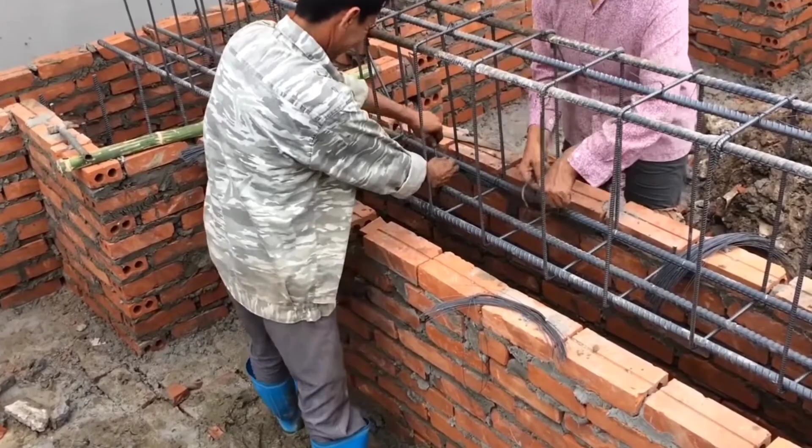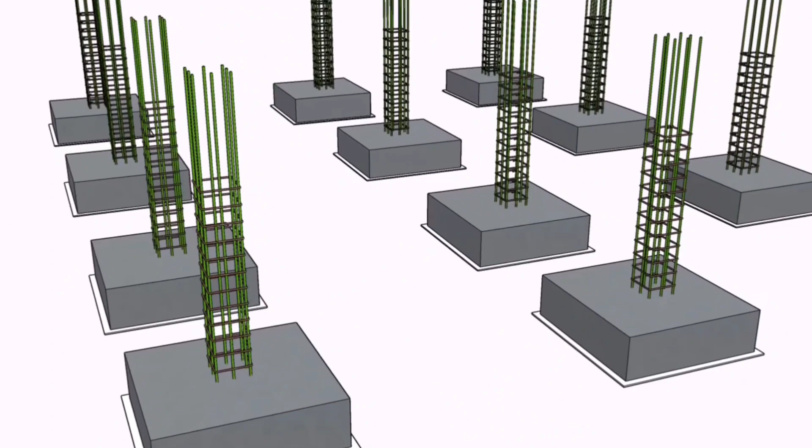Civil engineering is one of the oldest engineering branches and one of the best career options in engineering. Civil engineers are everywhere in demand, from municipal work to big construction projects. To have a successful career in civil engineering, basic knowledge is crucial about the related field. Civil engineering is a complex field that requires many knowledge, skills, and abilities to succeed.

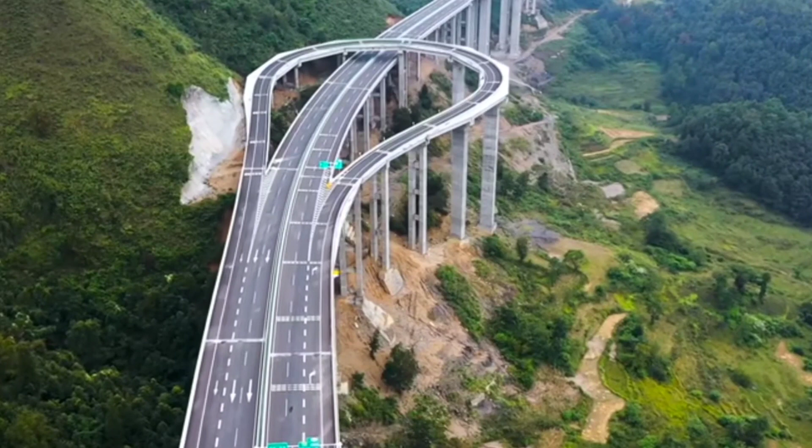It's not possible to become a civil engineer without having a degree in the area. But if you're getting started as a new civil engineer on your path to becoming a professional, you'll need these essential skills. Civil engineers are more in demand in construction, real estate, infrastructure projects, oil and gas, and other related industries. These are some of the largest and biggest employers worldwide after agriculture.

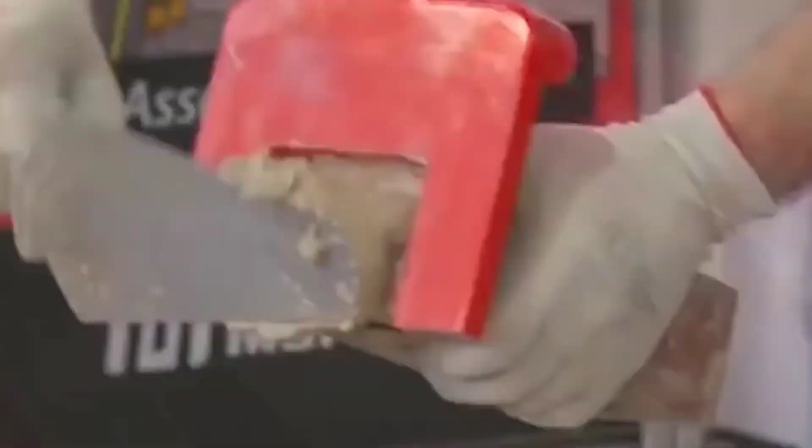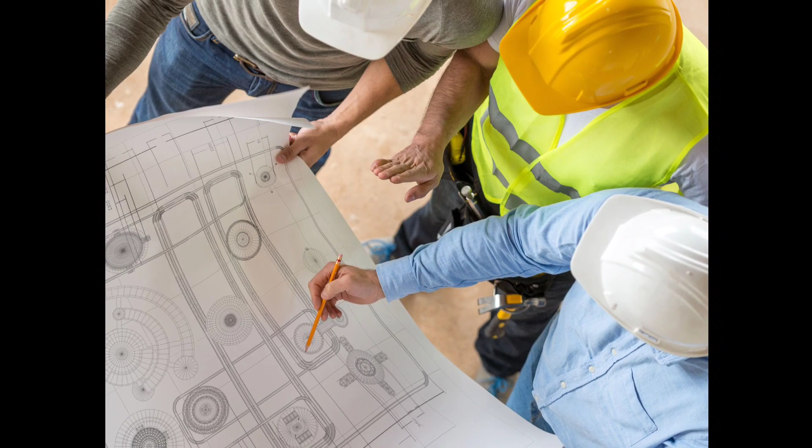A civil engineer needs to know basic civil engineering. These civil engineering basic knowledge, skills, qualities, and technical skills are essential for a fresher civil engineer. Civil engineers must improve their basic knowledge of civil engineering subjects and civil construction. As a fresher civil engineer, it is recommended you should add these skill sets to your resume and career profile. A person's abilities in civil engineering and the software skills required to become a successful civil engineer are discussed here.

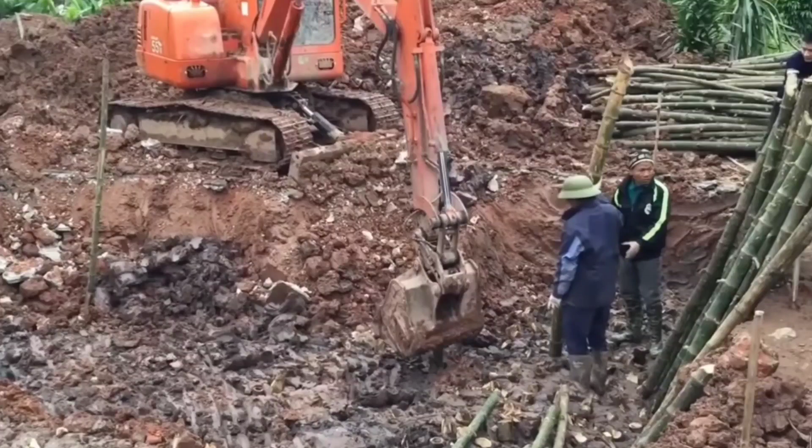So let's get started. Civil engineers design significant construction projects, such as roads, airports, tunnels, dams, and bridges. They also supervise project construction and maintenance. They must possess a comprehensive skill set, from cost accounting to geology. Many civil engineers have jobs that require a very hands-on role in construction, while others may have positions more heavily weighted toward supervisory and administrative skills.

So, civil engineers need to know the basics of civil engineering. As a civil engineer, you need to have the fundamentals of civil engineering to be successful. These include understanding the construction of bridges, dams, and buildings. It is also essential that you learn the basics of surveying and drafting to get involved in land surveying. Civil engineers must often manage complex projects, leading many to specialize in several areas.

You can find all the information and the essential skills and qualities and civil engineering basics to become a successful civil engineer. It is advisable to understand the basics of civil engineering theory and its applications before applying for a job in civil engineering. The relevant technical skills required by civil engineers include project planning, design, construction, introduction to geology and surveying, etc. A good civil engineer should have a level of mathematics and physics that identifies and solves engineering problems.

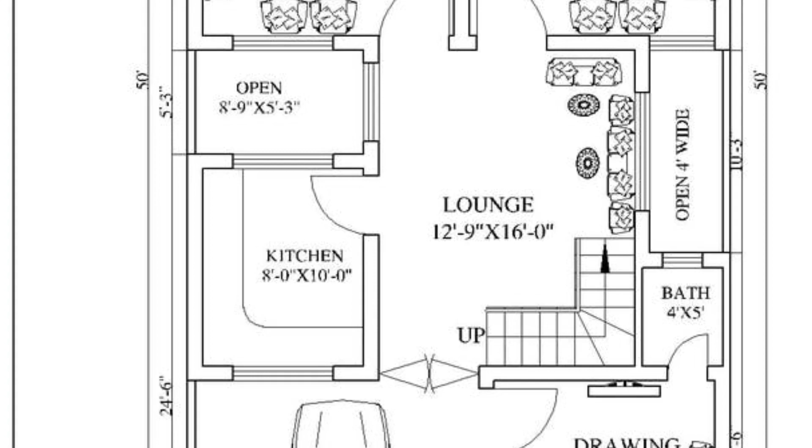Civil engineers also need to be skilled in design techniques and working with maps, drawings, models, and CAD software. They need to predict any possible future problems and find solutions for them. Every civil engineer must possess a high level of technical skills to carry out construction projects. Following are some of the top technologies they need to know.

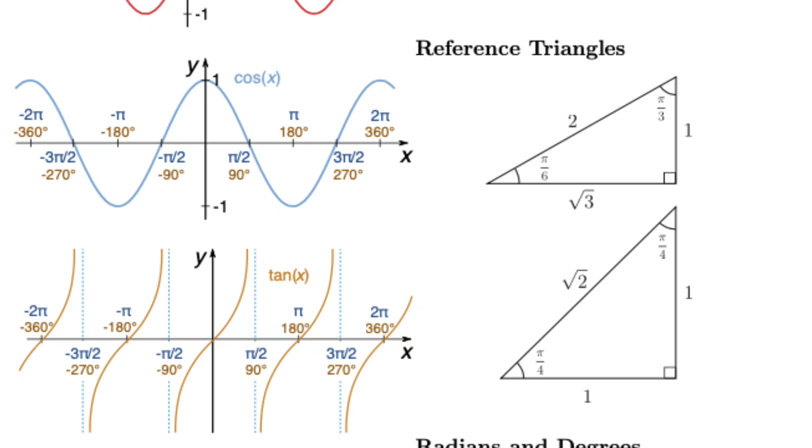Math skills. Civil engineers use the principles of calculus, trigonometry, and other advanced topics in mathematics for analysis, design, and troubleshooting in their work. Tests of building materials.

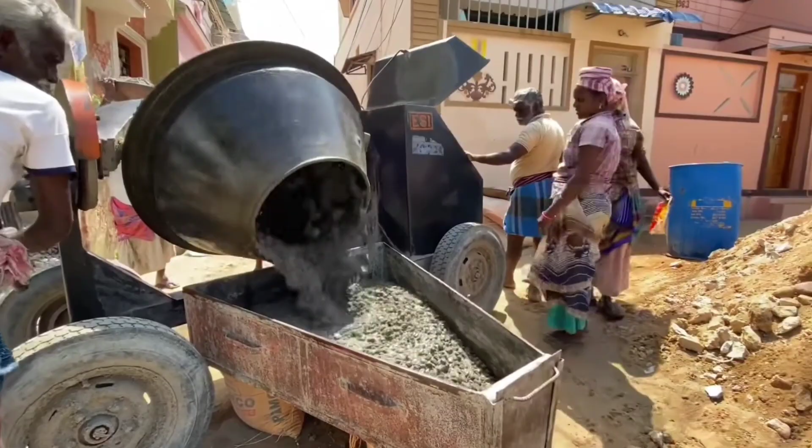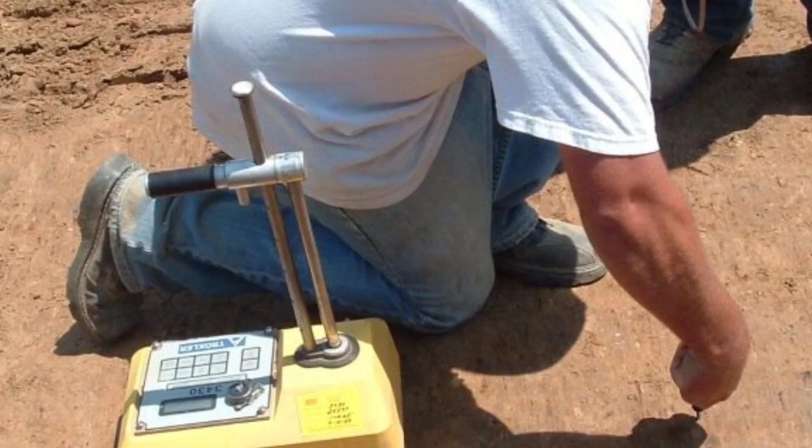A sound civil engineer should have proper knowledge of different tests of building materials. Some actual tests are listed below: concrete test - slump, compression, split tensile, and soundness test. Soil test - core cutter, compaction, sand replacement, triaxial, consolidation test. Bitumen test - ductility, softening point, gravity, and penetration test. Detailed video about the important points to gather in these types of tests within this week.

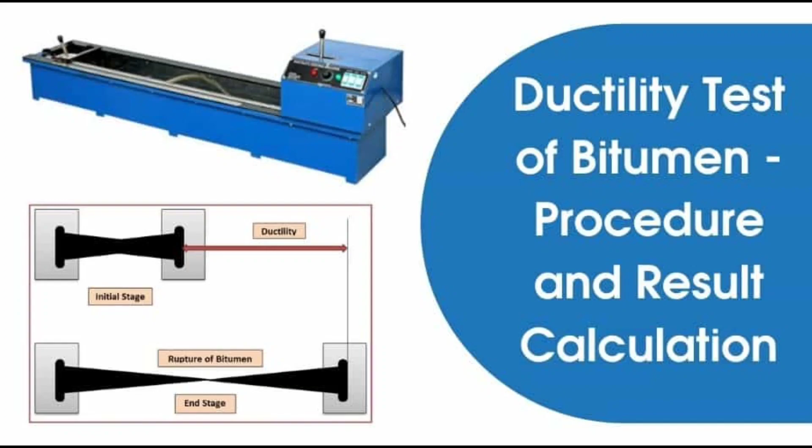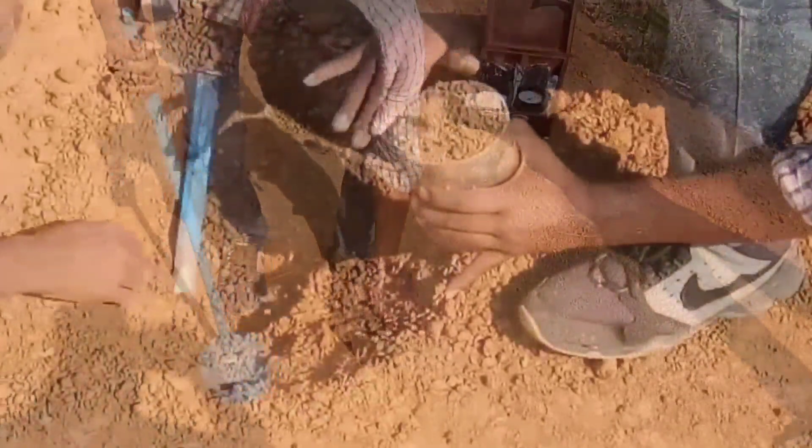Anyway, let's move forward. Investigation of soil. Various soil tests are conducted to determine the settlement and stability of soils before starting construction. So as a civil engineer, you should have enough knowledge of these tests performed at the site.

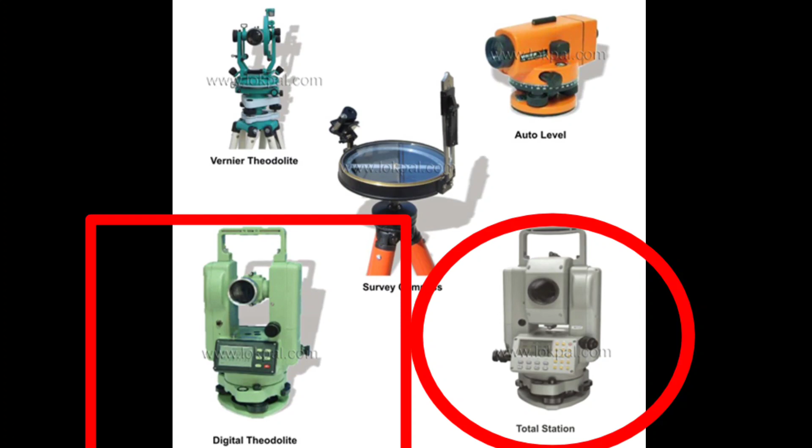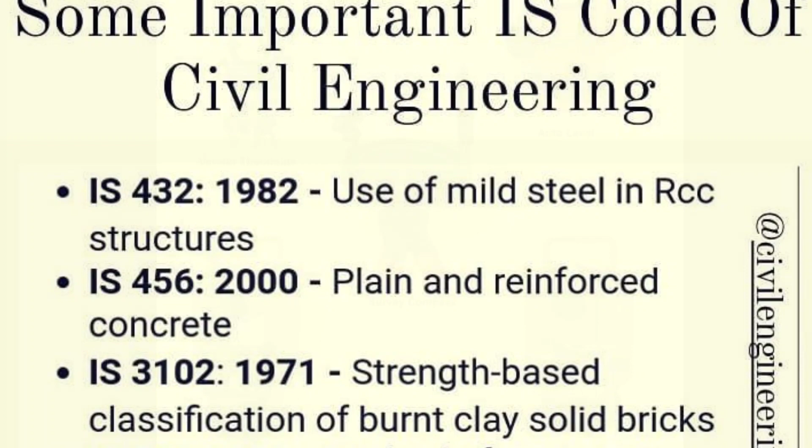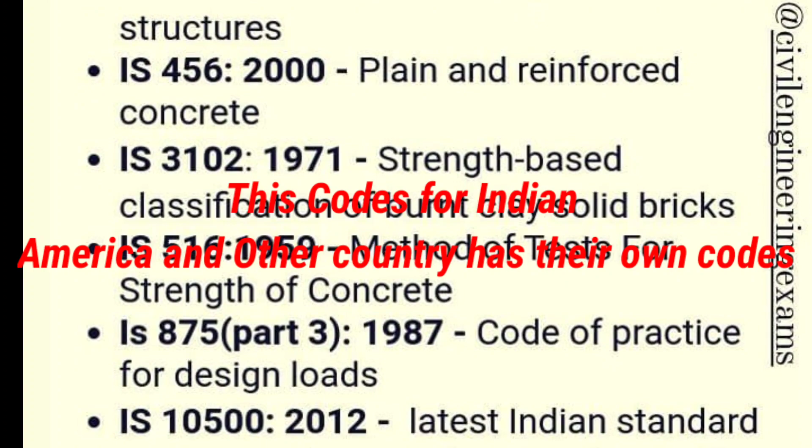Uses of surveying instruments. Usage of surveying instruments like the total station, theodolite, are also mandatory for every civil engineer. These instruments are used for marking and measurements. Standard codes used in construction - every country has its standard safety specifications, for example, code for construction-related works. All new construction should follow all the rules and procedures mentioned in the standard codes. Otherwise, the chances of failure of a structure will always be high.

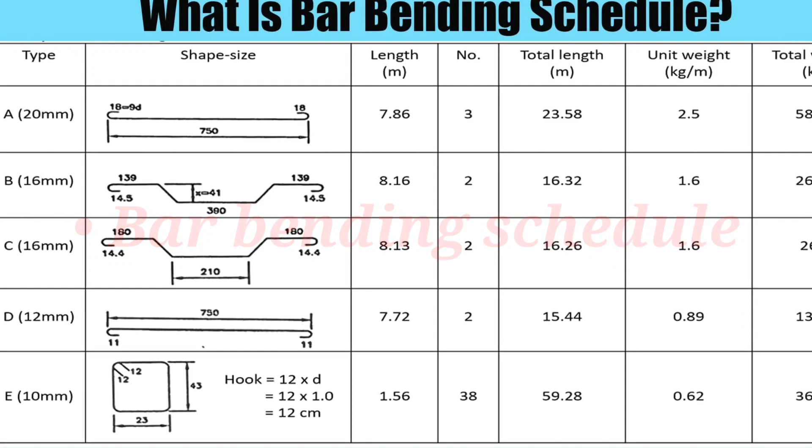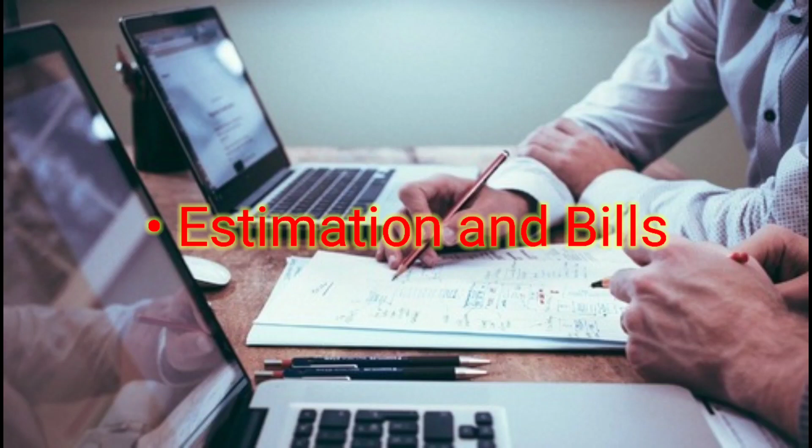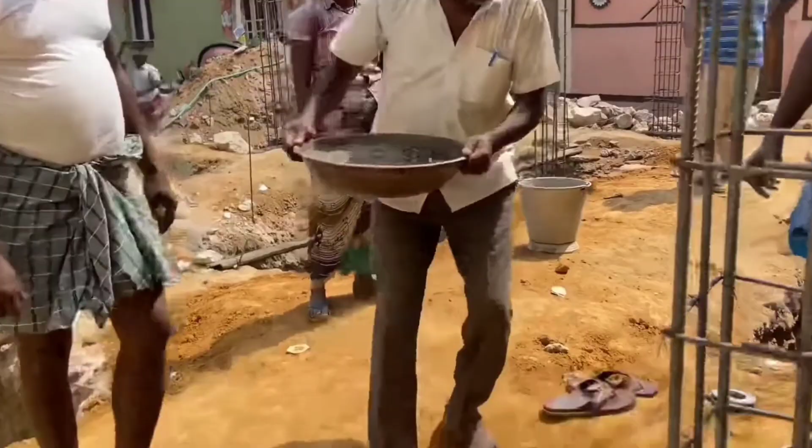Bar bending schedule. The bar bending schedule is essential for civil engineers and civil engineering basics. It provides the reinforcement calculation of the RC beam, such as cutting length, bending, size of bending, etc. Estimation and bills - a civil engineer should prepare estimations and bills for a construction project. Quality control ensures the profit of a project by reducing the extra costs. So you must have a basic knowledge of quality control, on-field management, knowledge of formwork, concreting, and safety measures, etc. is also an essential aspect.